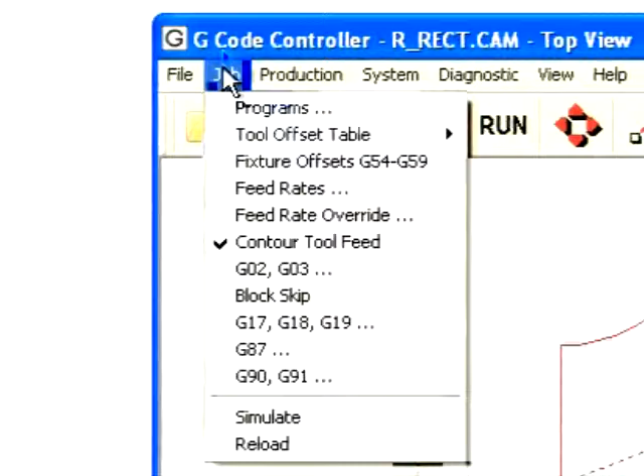The location of the work within the operational area of the machine is another essential setup that may change from job to job. The positioning information contained within the part program always refers to a frame of reference called a fixture offset. The fixture offsets settings allow you to offset the script's dimensional frame of reference from the machine's home position.

G-code controller supports up to 6 frames of reference, which can be changed within the G-code script using G54, G55, G56, up to G59. The default frame of reference is G54.

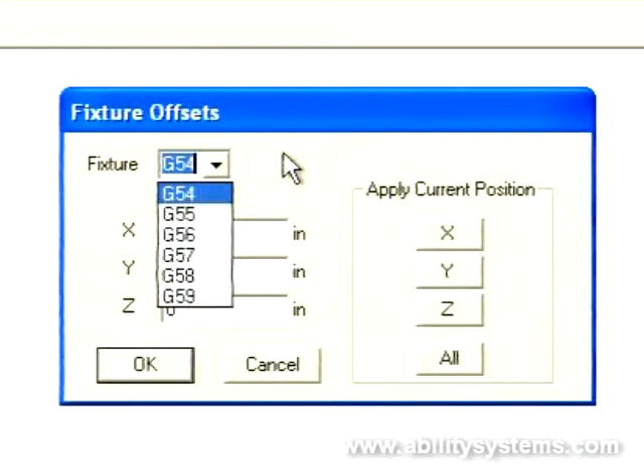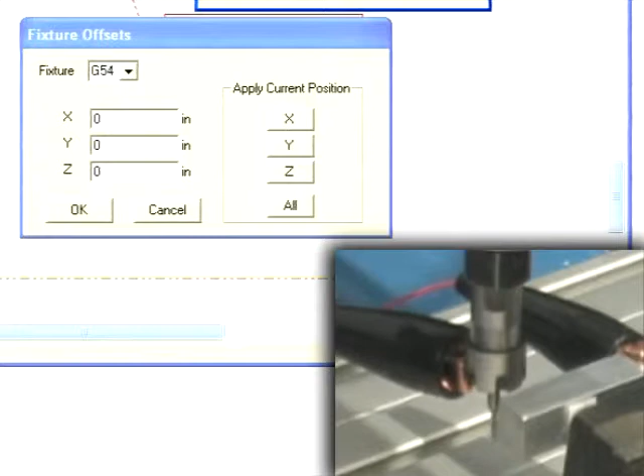The Fixture Offsets dialog displays the stages that you set up as active in the system configuration. You can type the offset values for the stages into the respective fields. Alternatively, you can automatically apply the current position of each stage. Notice that manual positioning dialogs are available.

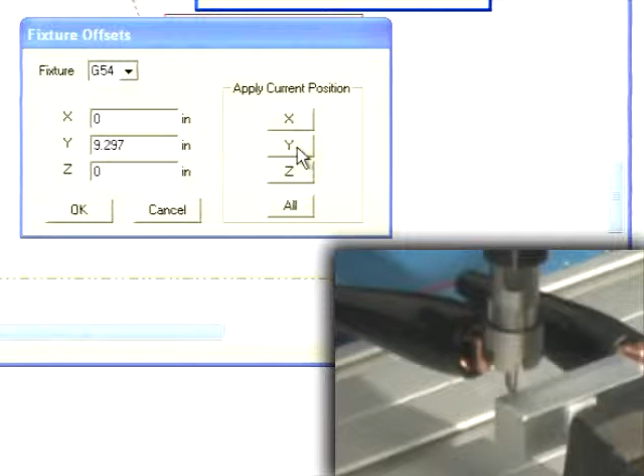You can apply the current position of each stage individually, as you might, for example, in a procedure to touch off the tool on the sides and top of a rectangular block. In this demo, a positioning block automatically arrests joystick motion at the fixture offset position, which can be automatically read into the Fixture Offsets dialog using the associated control button. The All button applies the current position of all stages at once in cases where that might be more convenient.

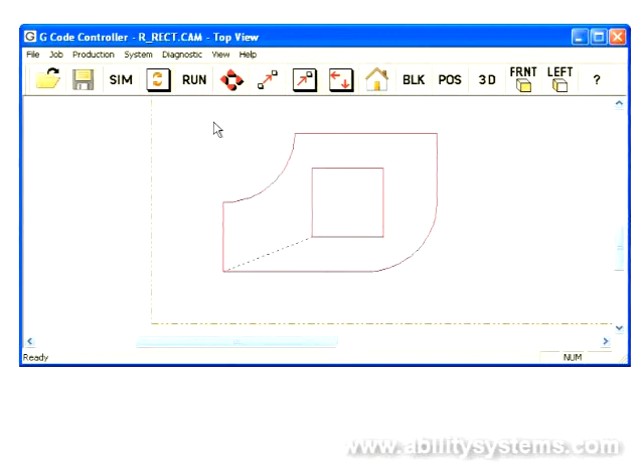Automatic operation can be made to commence using one of 2 methods, run or dry run. The dynamics of motion for each of these methods, explained more fully in Part 7 of the series entitled Contouring, is set up in the Default Feed Rates dialog.

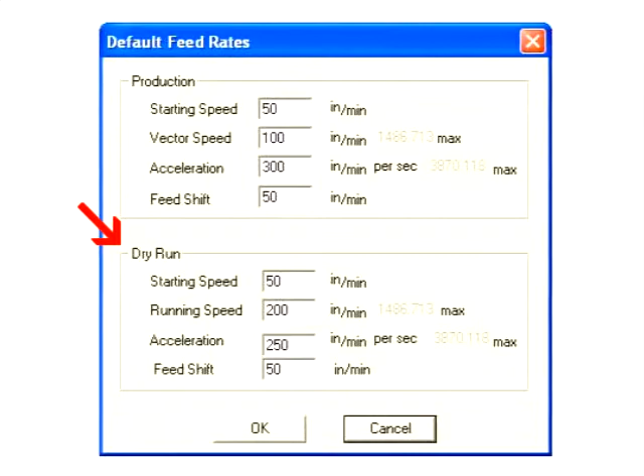The dry run operation is often used to check the integrity of the tool path and assure clearance from things such as clamps. The dry run rates are often set higher than the production run rates in the interest of saving time. An F command within the G-code script can be used to change the feed rate during the run operation. The F command has no effect on the feed rate during a dry run operation.

However, in some production settings, it may be important to keep the feed rate override control from accidentally changing a cutting speed that had been previously determined. Leaving both feed and rapid traverse checkboxes unchecked accomplishes this purpose.

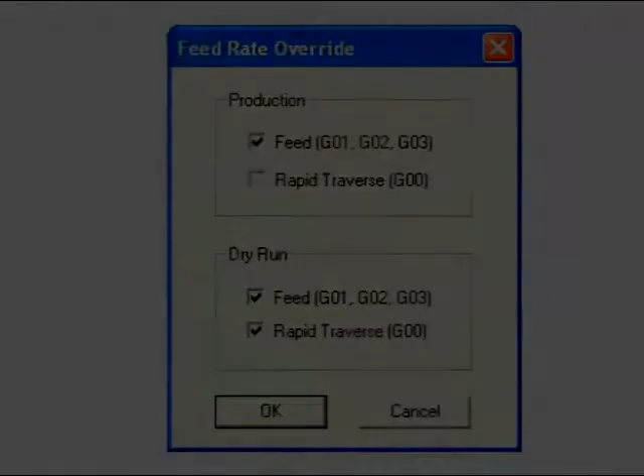The Contour Tool Feed feature, also explained more fully in Part 7 of this series, is generally enabled. Disabling this feature allows you to advance the motion under control of the part program in finer increments for troubleshooting purposes.

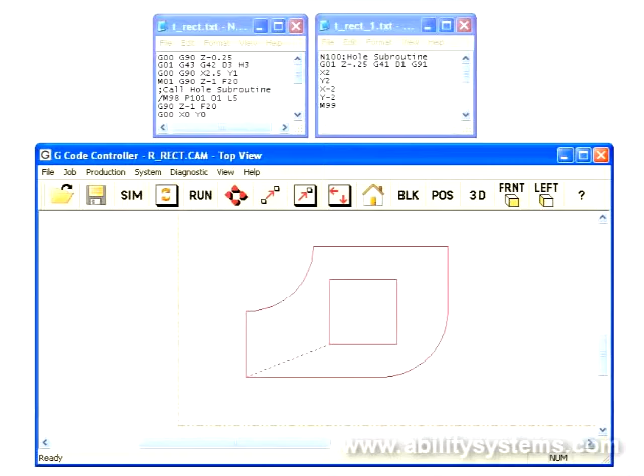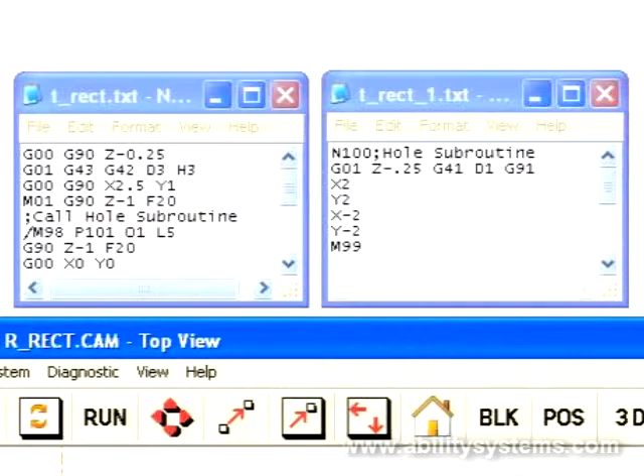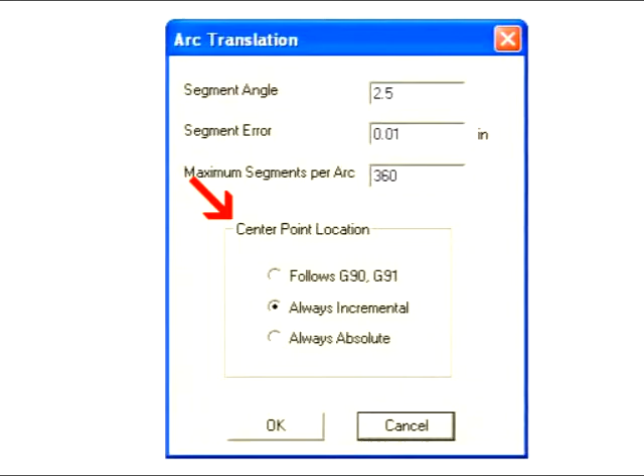Snapping over the G02, G03 menu brings up the arc translation dialog. The center point location group specifies how the center point locations for arc interpolation will be interpreted from the G-code script. The always incremental setting is the most common and similar to Fanuc controllers.

Some older controllers interpret the center point location arguments as absolute positions. Some other controllers interpret these locations according to the current positioning mode within the G-code script. If the mode was absolute, instantiated by G90, then the center point values would be interpreted as absolute locations. If incremental, instantiated by G91, the center points would be interpreted as distances from the current position.

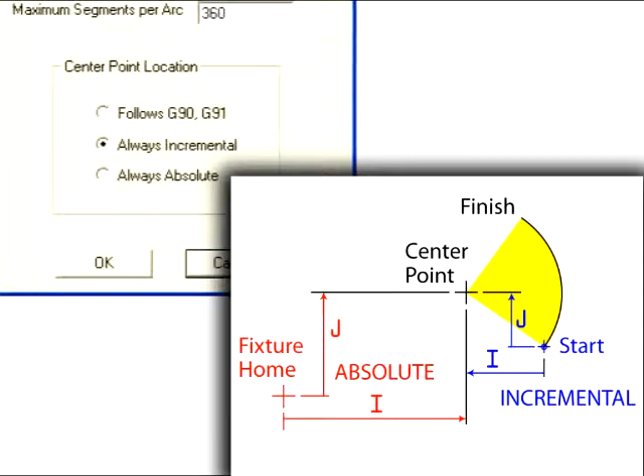This group allows you to set up G-code controller to emulate these different types of controllers. The always incremental setting, however, is recommended. Arcs are approximated using multiple straight line segments called facets. Segment error is the maximum distance between the facet and the true theoretical arc.

For a given segment angle, segment error becomes more pronounced with larger radii arcs. In most cases, a given segment error is less tolerable for smaller radii arcs than larger ones. In order to accommodate the greatest range of large and small arcs in a single job, G-code controller uses the following strategy. Arcs are generated in segments subtending the setup value for segment angle.

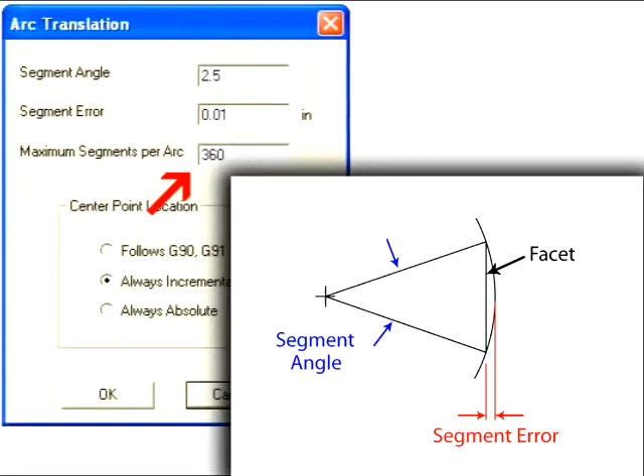However, if the radius of the arc is sufficiently large, the arc will be divided into sufficiently small segment angles so that the setup value for segment error will not be exceeded. The maximum segments per arc field guards against extreme proliferation of segments.

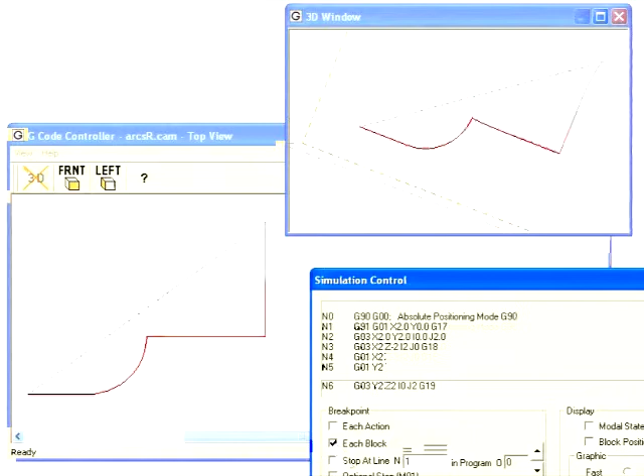Arcs are subtended along the current reference plane, instantiated by G17 for the plane in XY, G18 for the plane in XZ, or G19 for the plane in YZ. This toolpath demonstrates arcs subtended in these three planes. Also, the axis normal to the reference plane will be the drill axis for the canned G-code cycles. This dialog establishes the default reference plane.

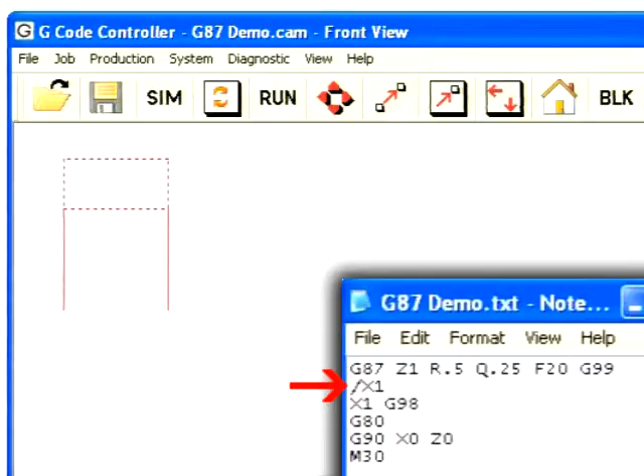If the skip block feature is enabled using this menu, then any line or block within the part program that begins with a front slash character will be ignored. In this example, 3 canned drilling procedures are performed at 1-inch intervals. With block skip off, all 3 operations are performed. With block skip on, the block with the front slash character is ignored and only 2 holes are drilled.

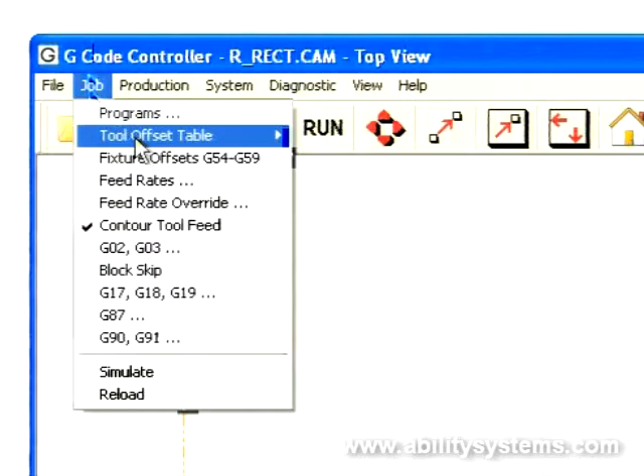The Tool Offset Table menu provides for length and radius offset compensation for up to 100 tools. The spin buttons are used to select the tool that you wish to size. The diameter of the tool can be entered into the D field. The length of the tool can be entered in the H field.

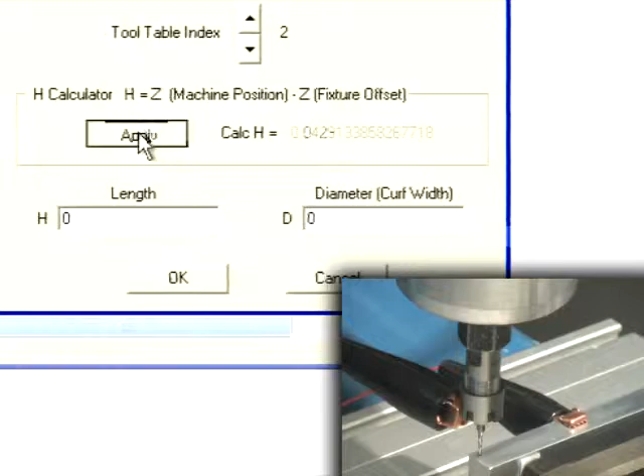The value for tool length compensation can be conveniently determined using the H calculator's Apply button. You can use manual positioning controls to touch off each tool on the drill stage's fixed or offset position. When you snap Apply, the relative offset for that tool will be automatically entered into its H field.

In some production settings, it may be convenient to keep collections of tools preloaded in collets and sized. For this reason, you can optionally save and retrieve a collection of H and D offsets to a separate file. When the job is loaded, then, the values saved under that file will be automatically loaded.

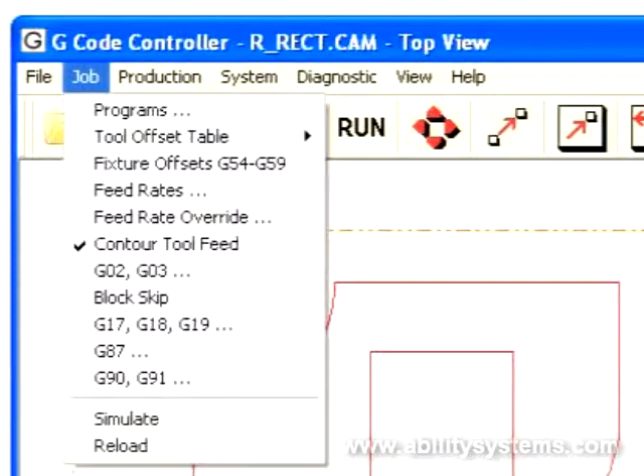As mentioned, most of the settings accessible from the job menu will not have to change from job to job. Sometimes only the file name or names of the part program will need to be changed. All of the settings, nevertheless, can be saved together under a unique file name using File, Save As. Or, changes can be used immediately to run the job, which is the topic of our next session entitled Automatic Operation.